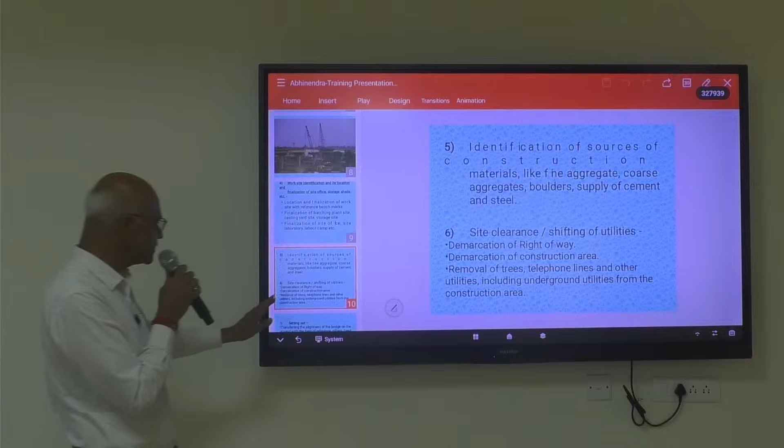So then comes site clearance and shifting. You already know this: demarcation of the right of way, demarcation of area, removal of trees, utilities, everything. I won't waste time on these things. Then setting out, transferring the alignment by reference pillars. Then I will switch over to the foundation, open, pile and well foundation.

No. See, the basic point is that there have to be at least two reference pillars in the entire linear project. If it is a very lengthy project, with reference to those standard benchmarks you have to set up some reference pillars in between, because you cannot every time carry the level from the reference benchmark. So it is better to have near every pier or near every abutment one reference pillar with transferred RL and coordinate written there. So with that you can easily carry.

So what we did in our Namkum bridge, when the pier gained height, we marked the level in the pier shaft itself. And from there, with the help of taping, which is accurate, you can carry it. There will be an error of 5 in leveling, because that's the least count of the staff. But suppose you mark the level in the pier shaft at the bottom, and with the help of that you start scaling the height with tape, that will be measured exactly. So that can be done to prevent any error.

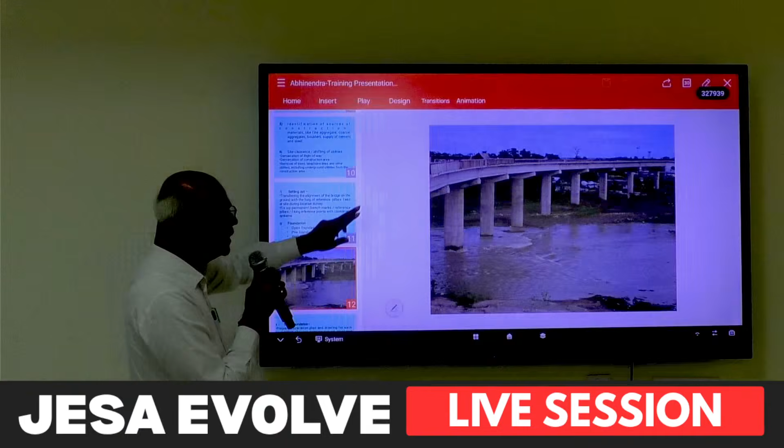Okay. So open foundation. This is the bridge in the river. So first, we come across two types mainly, just pay attention to it. Hello, Anshul. So we encounter two types, open and pile, in our cases, even in WRD, even BCD, or maybe in DWSD. So mainly open foundation is there, and in case of bridges it's pile foundation.

So for open foundation, we have to prepare an excavation plan showing the ground level, proposed founding level, and side batter. If we go deeper, there has to be a side batter of 1 in 1.5, otherwise the side will collapse. And the bottom of the excavation has to be 500 more than the size of the footing on each side for providing shuttering, for cutting the drainage, everything. So there are 3 to 4 vital points about open foundation which I will elaborate, because these are the human errors people commit.

Open foundation should be constructed in dry condition. But if dry condition is not available, dewatering has to be resorted to. So what happens when we start dewatering and concreting? When pumping is going on and the water has come above the level of the leveling course, PCC, along with the water, cement is also extracted and gets pumped out. This is a very human blunder we commit. So we should not do that. I will suggest what is to be done.

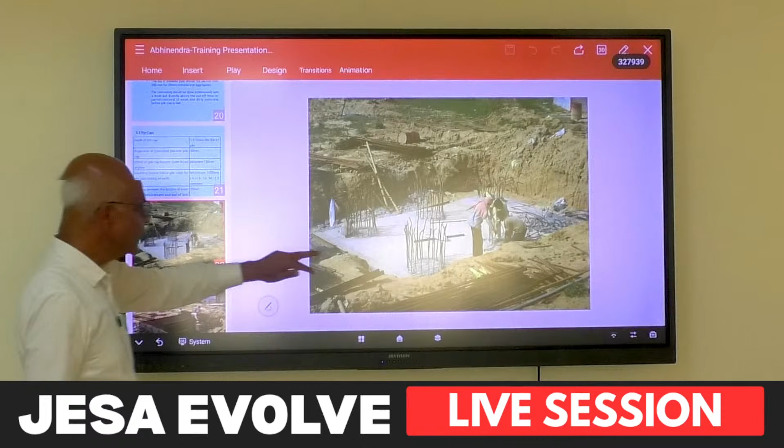So this is how, when the pile is broken, you will get this reinforcement exposed, and this dirty concrete is removed. This one is there. Now here comes: we should always conduct a pile integrity test. Okay, pile integrity test is done.

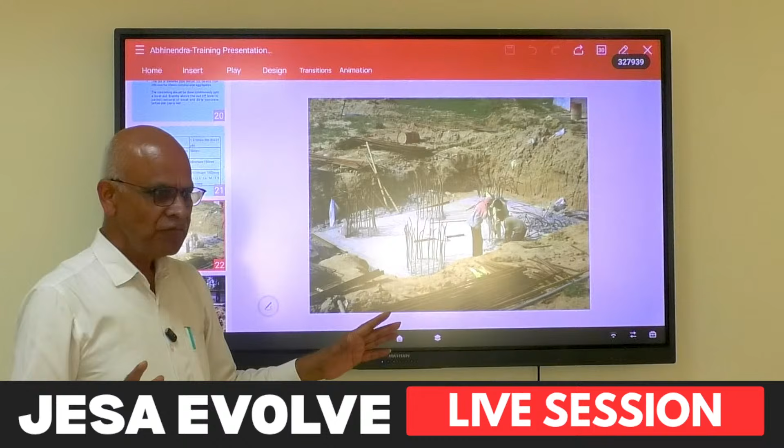The 50 mm will not be visible here. You can see here it is slightly above. But to be very perfect, because when chipping it is never always the same, it becomes an irregular shape. So if you leave the liner of 50 mm, you will get a perfect shape. Okay.

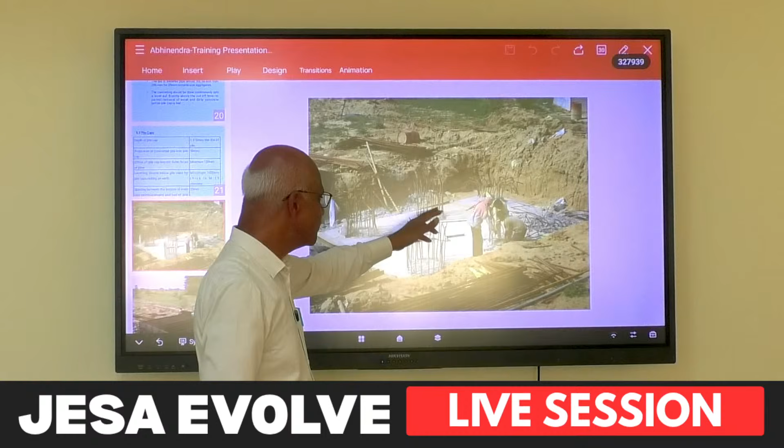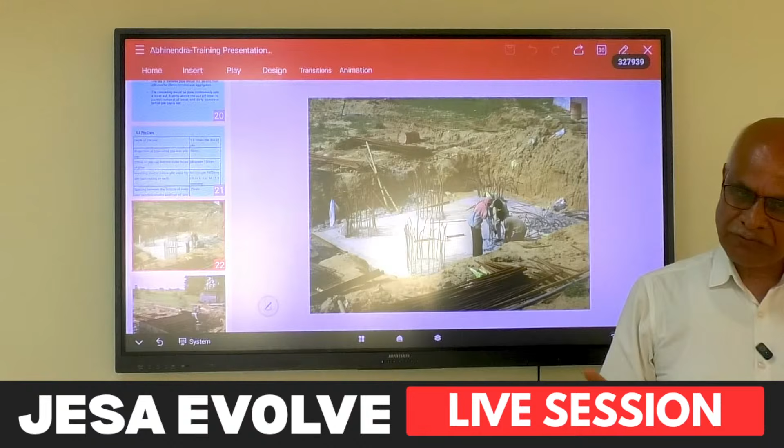Now the pile integrity test is done. PIT. The pile integrity test is done before the pile load test, to check whether the pile is continuous or not, whether integrity has been broken, whether there is necking somewhere or collapse of soil. So a hammer is struck on the top here, and its reflections are recorded, and there is a mechanism. When you go in detail, you will know it. But as of now, understand the pile integrity test is a must.

So if you conduct the pile integrity test on every pile, that's well and good. In some cases, contractors themselves conduct it. No, working pile. PIT is conducted on the working pile.

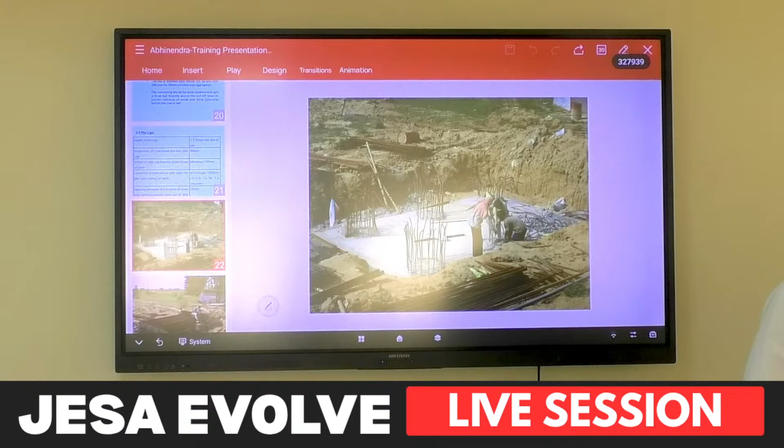If it fails, then you have to make an extra pile. The contractor has to bear it. But there can be another pentagonal arrangement. It has been done sometimes. So six piles are there. That pile will be there itself. You make another pile there.

So after, if the pile passes in PIT, then go for the pile load test. So the pile load test can be done. Suppose up to 50 piles are there: two routine tests. If 50 to 100, I think it is three, and 2% of the total number of piles. It's written in the book. But after leveling, after breaking this pile.

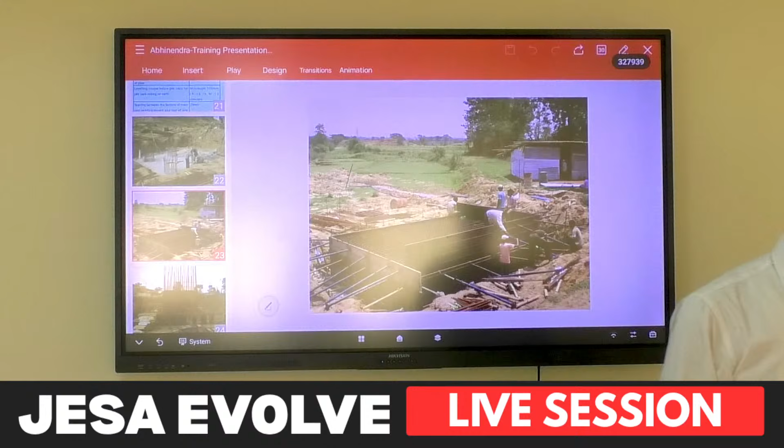Yes, yes. Another pile. And we will take into consideration with the consultant what will be the strength of this other pile, whether the group of piles will sustain or not. Okay. Huh? Yes, yes.

Load transfer will be eccentric. Accordingly, the center of the pile may change. So that will be incorporated in the superstructure, because it has happened. I won't name the project. It happens, and it has always happened.

So a pile cap can be done in any shape. The normal shape is a regular shape. It can be like this pentagonal. It can be rectangular. Along the road, it can be lengthwise greater. Suppose there are two pipelines running, so the pile cap has to be designed in such a way that it can be accommodated without shifting the pipe.

Yes, why not? Ultimately, you can't work on a defective thing. When the defect has been detected, we have to take it into account. So many contractors are so concerned about it that they themselves conduct PIT on every pile, because ultimately their stake is there. Even if you don't say, all mega contractors will conduct it. They have to be very sure.

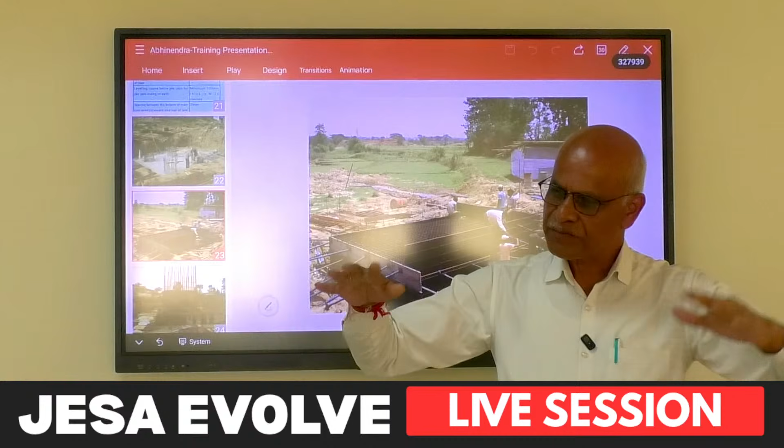Then the pile load test, dynamic pile load test. The dynamic pile load test comes after that. The static pile load test is a very standard one, but it consumes a lot of space and a lot of arrangement. So people are now conducting the dynamic pile load test. Some contractors are conducting at least one dynamic pile load routine test on every pile cap location.

PIT on every pile they are conducting themselves, even if it is not there in the specification, because they can't take chances. Foundation is the main thing; when the foundation is not strong, how can the superstructure be strong? So some mega contractors are doing it themselves, even if it is not a provision in the contract. So for the dynamic pile load test, again, the head is to be built up.

We have broken the dirty concrete. Then the head is to be again built up to top level. Then after setting for at least 15 days, one standard hammer load is dropped, and the waves generated are analyzed. That analyzer is there, and you won't believe it, that gives the shaft resistance of the pile, the end

bearing resistance of the pile, and PIT also gives the length of the pile. It will give you how much is the length of the pile. Apart from that, the dynamic pile load test will give the shaft resistance, end resistance, the pile capacity, everything.

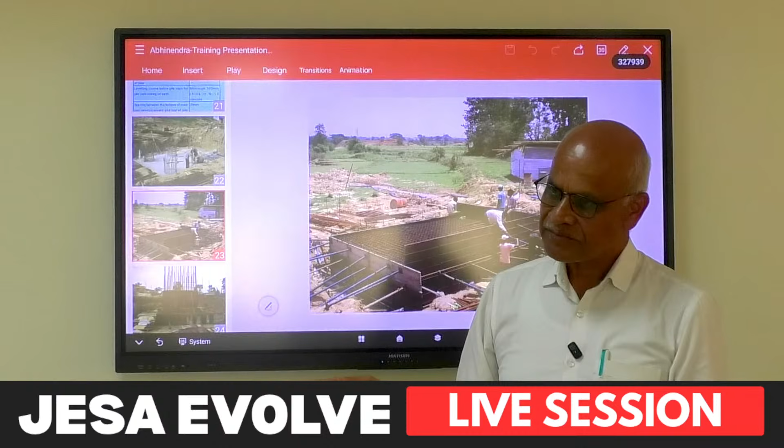The normal thing is 28 days, but all these things take a lot of time, because when you do a concrete trial mix design, it takes a lot of time. So there are some ways, shortcut methods also.

When you go by the procedure, dirty concrete will always come at the top. But when you have committed an error, PIT will detect your error. No, no. During the process, when the pipe has not been withdrawn and the pile casting is continuous, the dirty concrete has to come on the top, because there is a continuous pushing charge. So where will it go? It will come on the top. Error can only happen when you discontinue the pile casting or you pull the pipe from the mass concrete.

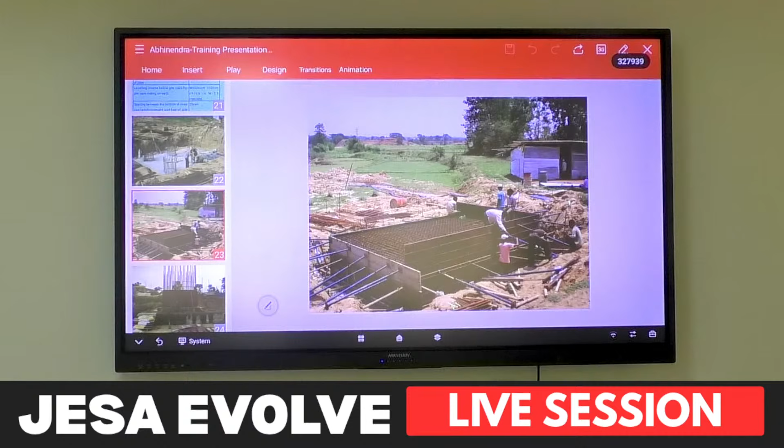No, there is a procedure given. In the yellow book, there is a procedure already given. Suppose by chance you have withdrawn the pipe for some reason, so there is a recovery also. Immediately you put the pipe inside the concrete mass. Suppose the concrete is plastic concrete. Suppose the concrete is hardened. There is no chance, because the dirty concrete has already hardened there itself.

So the dirty concrete can move as long as it is in plastic state. When it is continuously in moving condition, it won't set. So that dirty concrete will come. But suppose you immediately withdraw the pipe, there is a long procedure given. Again, you have to put a cap there at the bottom plug. You have to insert it forcefully inside. And if it is in plastic state, if you start, that dirty concrete will come at the top. So there is a procedure given in detail in the yellow book. So what happens when we commit a mistake?

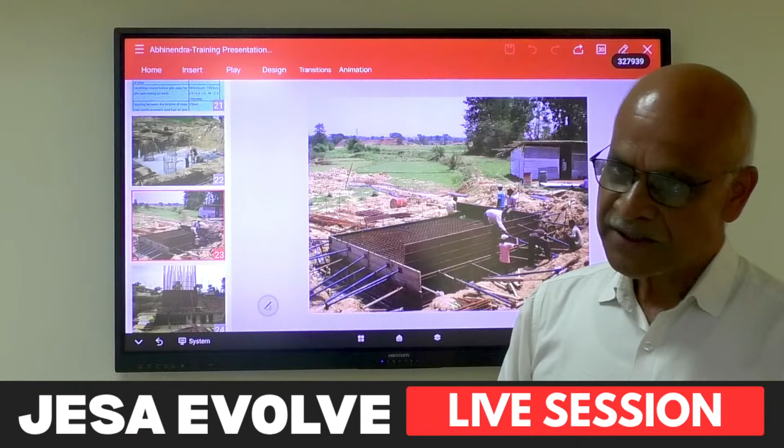Now, this is the reinforcement for the pile cap. This is the pile shaft. So I will not go into substructure. We all know what substructure is. There is no need of going in detail. Now, pier caps and abutment caps, pedestals.

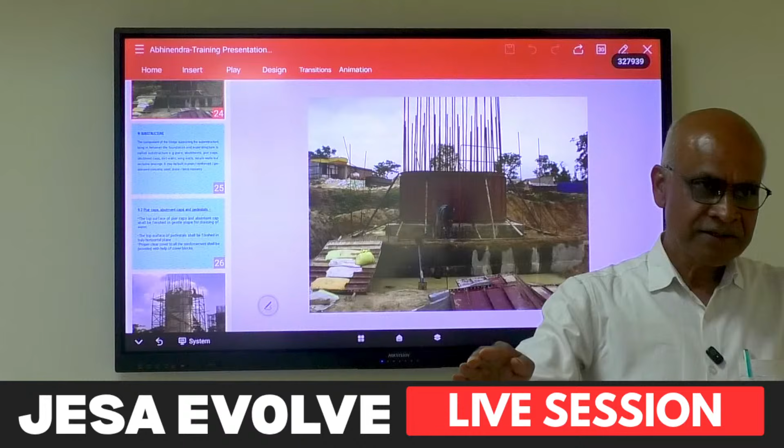So with the pier cap, the mistake people commit is that sometimes they cast the pier cap horizontal. Casting should be horizontal, but finishing should be in a slightly gentle slope towards the river, so that whatever water comes on the pier cap is drained, so there will not be any vegetation growth. So above the pier cap, after casting the pedestal, you can make one artificial camber, so that if water is oozing from the expansion joint, it can be drained. And if water is not drained, there will be a lot of vegetation growth on the pedestal.

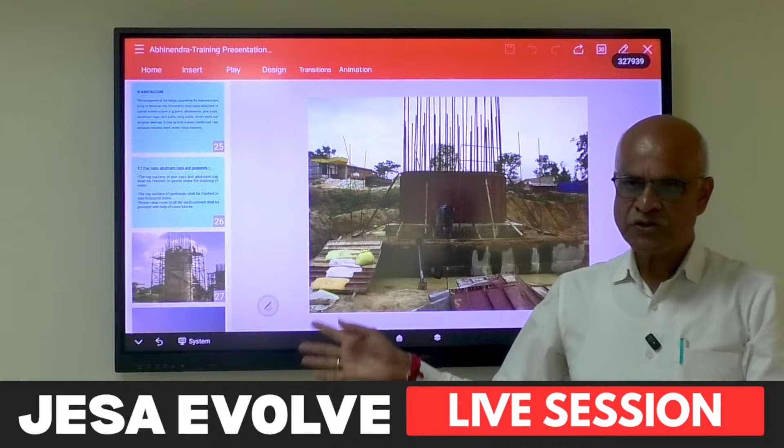Then the most important thing, the pedestal. Pedestals are one of the most important things, which transfer the load from the superstructure to the substructure. But being the most important thing, it sometimes becomes the most neglected thing. And sometimes it gets crushed. There have been several cases of bridge failure where pedestals themselves have crushed. When pedestals crush, there will be a level difference, and the span will get dislodged.

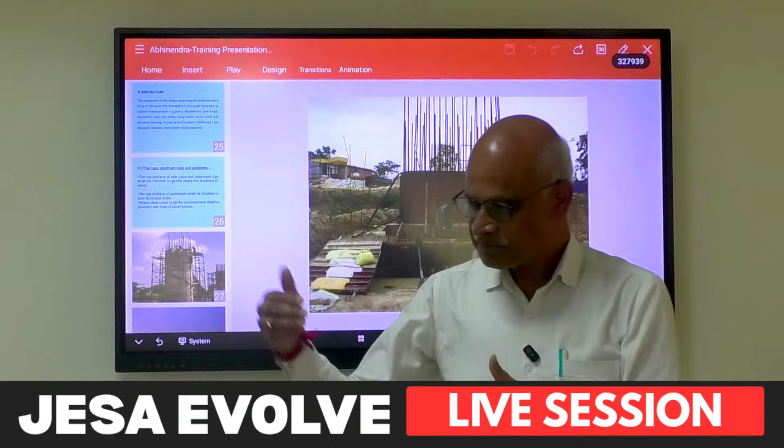So pedestals should be of higher grade concrete than the pier. If the pier is, suppose, M35, its pedestal should be at least M40. Horizontal seating should be there. It should not be sloped, because the bearing has to come on that. Then it has to be cured properly, and proper vibration should be given, so that it becomes a dense mass, and curing for at least 14 to 21 days. Sometimes engineers leave it to the munshis and laborers on site: oh, you construct it. So that is to be taken care of.

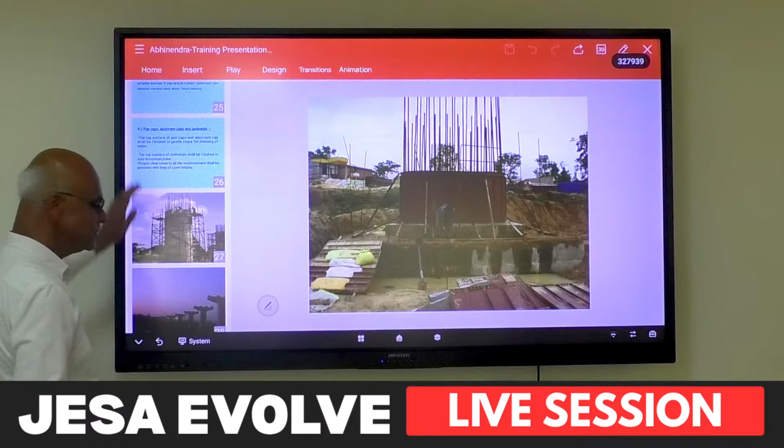I won't name the bridge, what has happened there. So, now coming to the superstructure. Superstructure, regarding all across all departments, centering formwork.

This is very important. Sometimes formwork fails because there is no proper support from below. There is no proper bracing. So engineers have to check the formwork also, at least whether the support is sound, whether bottom plate has been given, whether bottom pedestal support, there is a tower setting, bottom pedestal has been cast, then drainage of water, we have to divert the water away slightly.

Never construct. Many people and contractors, they make a mistake. They make an embankment to the river bund and they erect on that, because that will restrict the waterway and that will induce erosion in the central area. So finish the substructure work and even the bridge work before the start of the monsoon season, so you don't have to go in the riverbed and block a part of the river.

Okay. So now suppose there is a pipe settling. So vertical pipes as well as bracings, they are very important. If you provide only vertical pipe, it is bound to fail, because while casting, load comes eccentrically. We start from this way, go through that way. So formwork is very important. Robust formwork needs to be at least checked by the engineer whether this is sound or not.

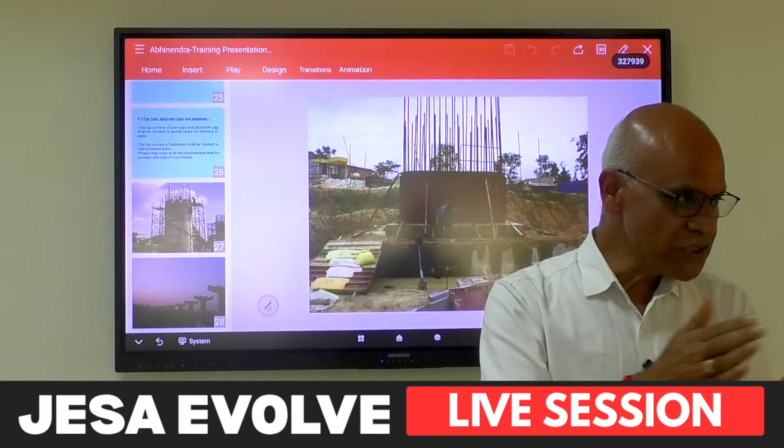Now verticality of the pier. Okay. So formwork, what are the things? Formwork should be watertight. There should not be any leakage of cement slurry. Formwork should be applied with shuttering release oil from inside so that when you open it, it comes off easily. Sometimes formwork gets stuck with the concrete and when you open it, a chunk of the concrete comes. So release shuttering oil should be applied.

Every joint of the formwork should be waterproof, either by applying some foam or some putty or some mechanism. Watertight formwork. Otherwise, when slurry leaks out, there will be honeycombing and there will be loss of water from the concrete.

Huh? Yes, yes, yes. Yes, yes, yes. So it should be done.

Suppose internal vibrator is there. First, I will come to the verticality. So before starting concrete, you have to check everything. Verticality. So from top, make an offset of 150 mm cantilever rod, hang one plumb. It is better to hang the concrete cube itself. Measure the offset at the top, at the bottom. If both are same, then it's vertical.

Okay, from all sides. But some tolerance is always there, 3 to 4 to 5 mm. But you have to apply your brain. Suppose on top setting is there, the bottom setting has been released. So offset will not be same. So you have to take out the thickness of the setting. So always use plumb bob for verticality in every lift. Don't leave it to the person there.

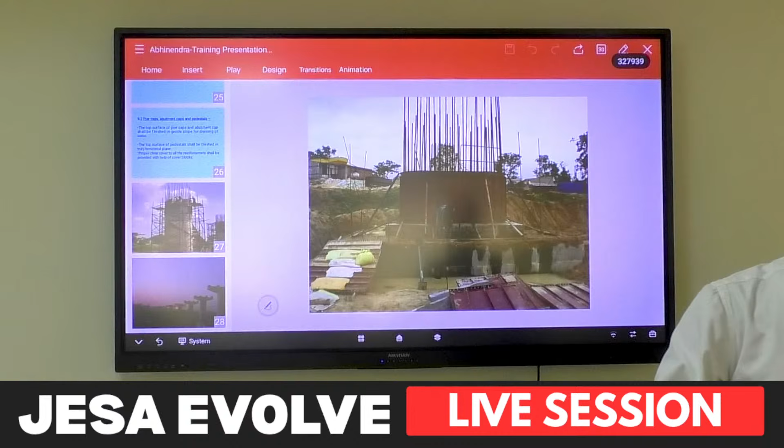अब है कि how to get a very smooth surface, how to prevent honeycombing. So if there is no water leakage, slurry, there will not be honeycombing. You might have seen many of the projects, the outer surface of the concrete is as smooth as Sunmica. How it happens? Because they will release shuttering oil first, internal vibrator and external vibrator also.

Shuttering vibrator. That shuttering vibrator vibrates the shuttering and that breaks all the bubbles and all the concrete is filled everywhere inside. There is no space left. The surface will become very smooth. So we use external vibrators, shutter vibrators, and internal vibrators for internal.

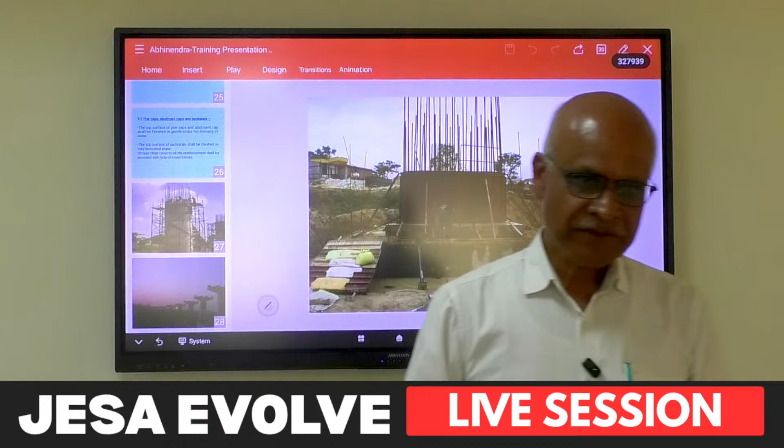No, no, it has to be used. All mega contractors, they have to use it. They know how to do it. Even if you don't insist, they will use it. So even in Namkum flyover, it was used for the first time in my knowledge, shuttering vibrator. So you will get a very smooth finish, and that smooth finish imparts longevity to the concrete.

Why? There are no micro pores. Okay, the clear cover is perfect. There will not be any corrosion to the reinforcement, because with honeycombing, ingress of water and air, that will lead to the corrosion. So when you apply your mind and you are very particular about these things, there will be perfect concreting. A very good question by Kundanji.

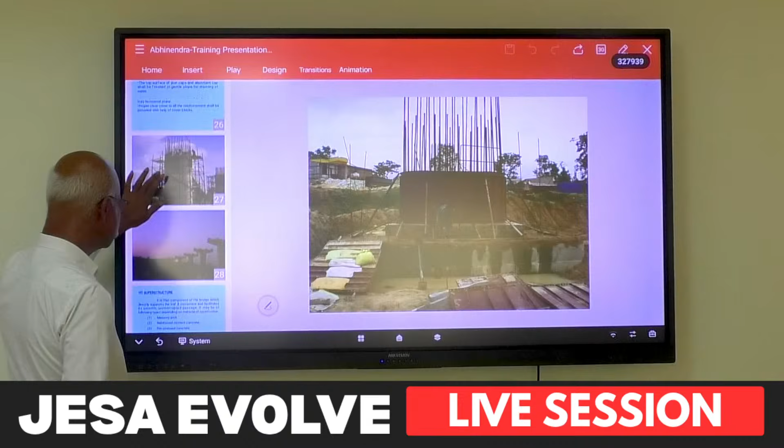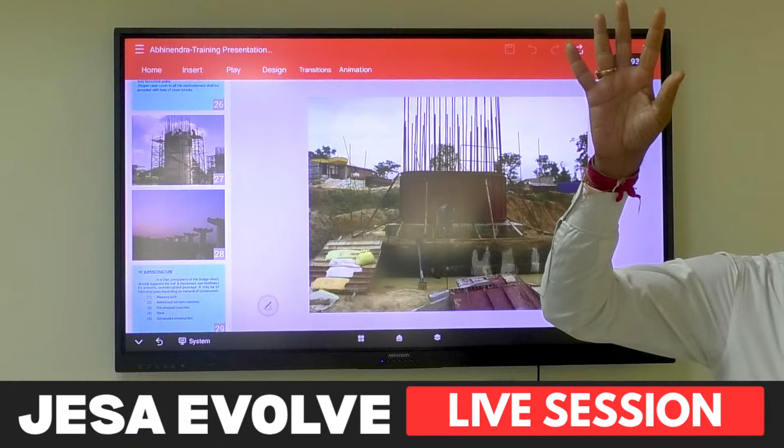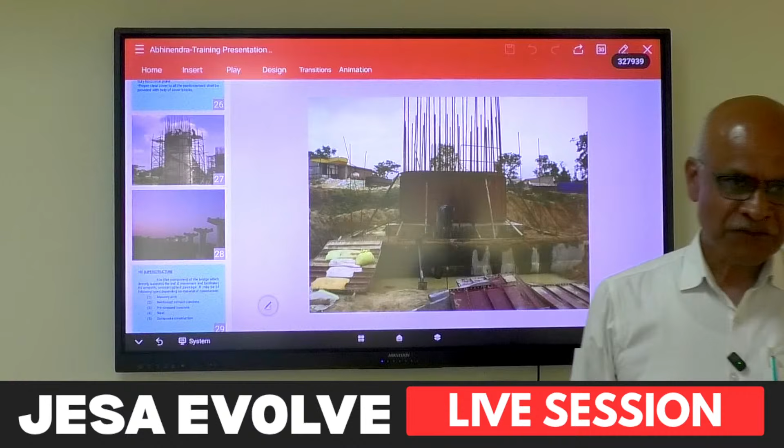Nowadays, electrical vibrators have also come because that is very convenient. In our days, we had to mount that oil engine at the top, and sometimes that used to lead to an accident also. Now, only wire has to go up to the top. So, compacting concrete is very important. Finishing of concrete is very important. Okay. So, is it relevant to you also?

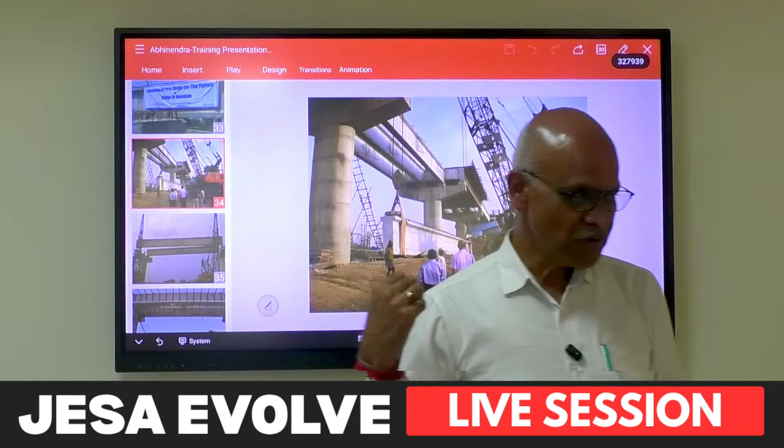Then I started launching. So this is the only thing there, and there is nothing between the two. Either you know it or you gain it, and if you can't do it, then quit.

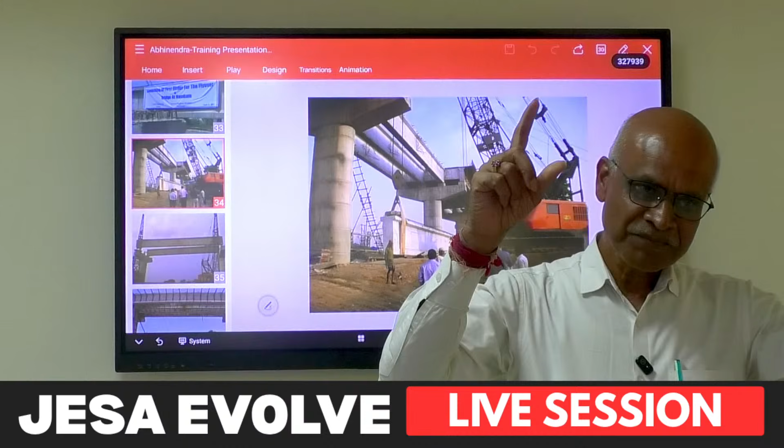Okay. So in launching, normally in cast-in-situ girders, they cast the web and flange first, and they cast the top flange along with the girder slab itself. When you launch a girder, the moment you launch it, compression is generated in the top because of erection stresses. So when you leave the web itself, it will get crushed, because the web is not designed for compression. So there has to be a top flange like this.

Top flange has to be constructed like this. And these are shear reinforcement which will go into the slab. So in the top flange, there is compression reinforcement. So when you launch, it will take the compression generated due to erection. So if you do it without a top flange, the web, which is not designed for compression, will get crushed.

Okay. So then the sling: there is a belt, called a sling, which is wrapped around the end. So there also some extra reinforcement is provided at the sling position, and that is taken care of during casting. So we have to decide beforehand whether we go for precast or cast in situ. Accordingly, the design will change slightly, and the arrangement will also change.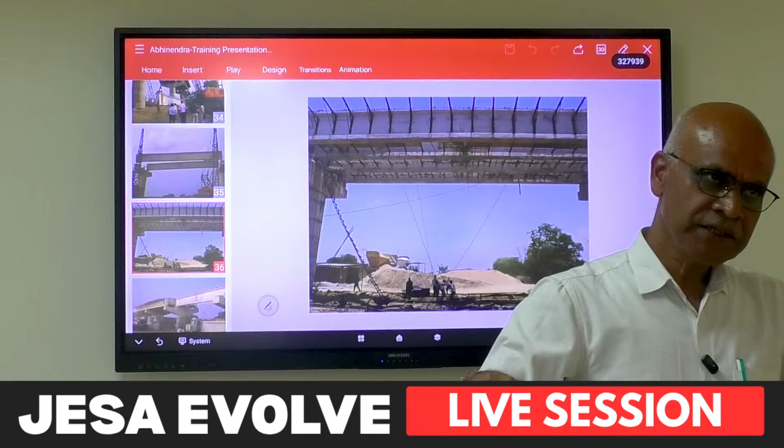So this is the beauty of the precast girder: there is no need of erecting shuttering, and you can take out the bracket from the top and go for the slab. So that exercise is saved, and even when you do it while the road is open, this area is clear. Otherwise, you have to provide shuttering and close it. At great height, it is not possible.

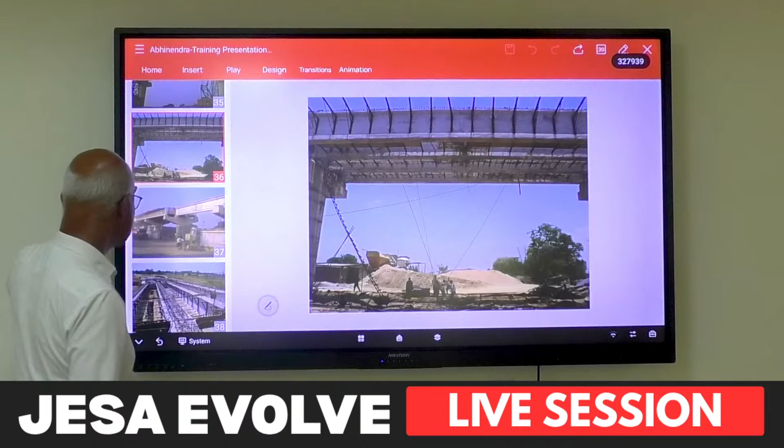So see, this bracket comes on that side also, and then the slab is cast. Then this is how it looks. This is curing completed at the top. Now, regarding this, I will tell you one thing. Prepare a curing register at the site: which component has been cast on which date, and paint the date on the component itself after setting.

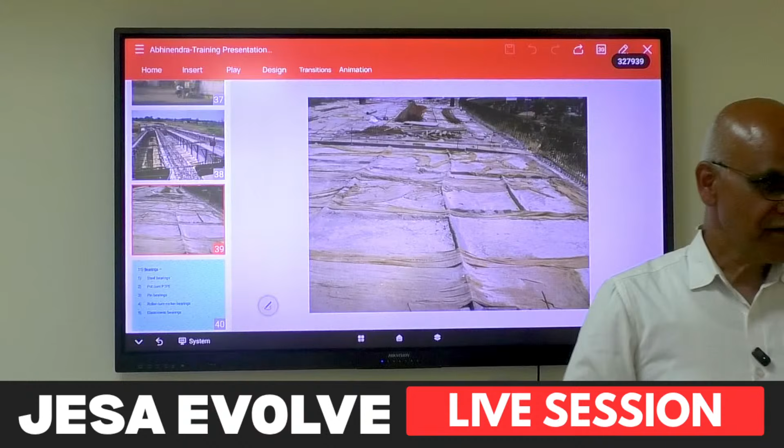So what happens? The person in charge of curing at the site continues curing what has already been cured, and leaves what is to be cured, which is under 14 to 21 days. So that mistake is human error. Again, human error.

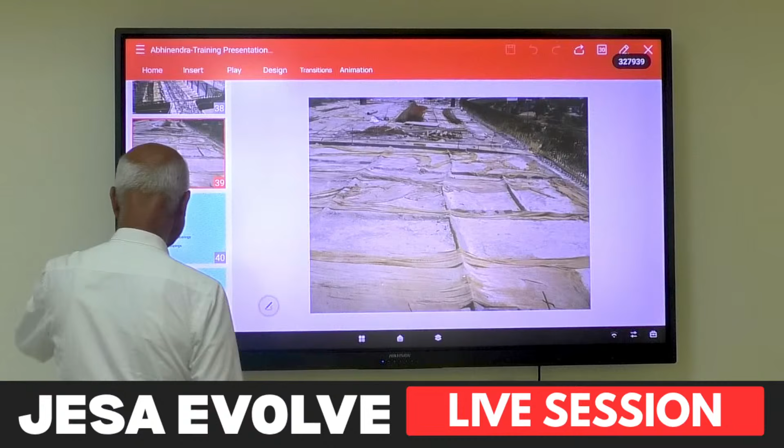Eh? Which one? Yes, bearing must be placed between two horizontal surfaces and true plan position control line. Seating concrete surface shall be free from impurities, everything. But main thing is that while casting, it cannot be truly horizontal.

Okay, before placing the bearing, you have to check with the spirit level, and if there is some irregularity, then there is one carborundum stone. When you start rubbing it, the concrete surface can be abraded and it can be made horizontal. Okay, so that's a very important precaution. Otherwise, when you leave it to the person, he will simply put the bearing, he won't even make a groove.

So to make a groove of 6 mm, just after casting, make a ply board of 6 plus 5 mm plus size of the concrete and press it in the concrete, so you will get a groove. So that bearing has to go into that 6 mm groove inside box. Okay. Sometimes people simply place it, so that will get dislodged. Okay.

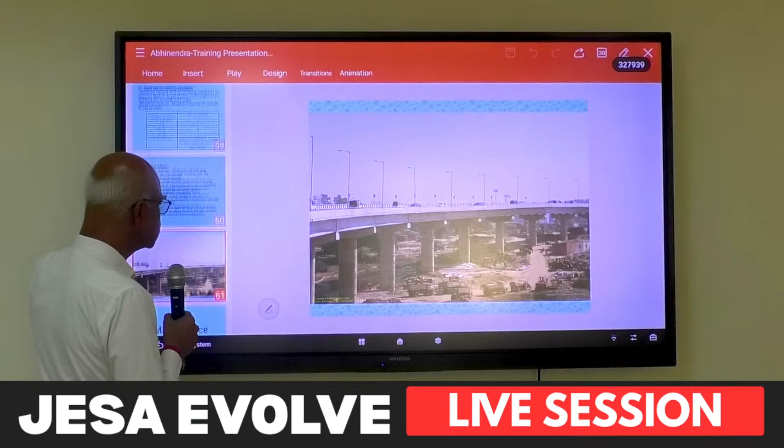But human errors like this have to be eliminated. What I have told you, the triplicate challan method and those methods. These human errors, they don't do it deliberately. Sometimes engineers, even contractors, don't do it deliberately, but ultimately human error should be paid attention to and it should be eliminated. Maintenance management.

What strength would be achieved? Target mean strength or characteristic strength? Are you talking about trial mix or working concrete? Working conditions. Then what is the target mean strength? FCK plus 3 MPa, mean of all 4 samples. Those 4 samples have to be tested. If the mean is FCK plus 3 MPa, okay. But individual samples should not be below FCK minus 3 MPa. When these two conditions are satisfied, then only the acceptance criteria are met.